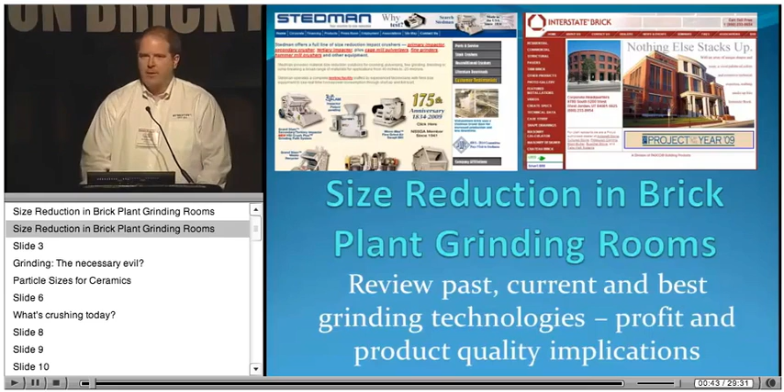So the fundamentals of size reduction, very basic. Forget about the types of machines. It's just adding energy to material to make large pieces smaller. That's the basis of it. Different types of machines exist to do that most efficiently, to put the energy into the material and get the desired product out at the lowest possible cost.

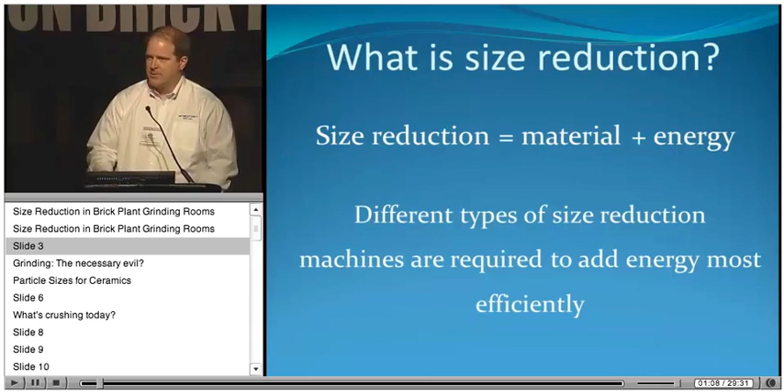Most of the people in this room were academically trained probably to make brick, and I don't find that the grinding room is the favorite place to hang out for most people in the brick industry, but it is a necessary evil. It's also something we're very passionate about because getting off to a good start with your raw materials is important, and we've heard that in a couple of the previous presentations already. So being consistent in how you prepare the material does affect the consistency of your product.

The equipment choices vary depending on the products you're making, and also the equipment choices will vary based on your raw materials. So even though there's a lot of common equipment in use, the combinations can be different, and testing is a very important element. Even though a lot of the same equipment is sold, we would really recommend testing your specific raw materials to make sure you're designing the process the right way with the right pieces of equipment.

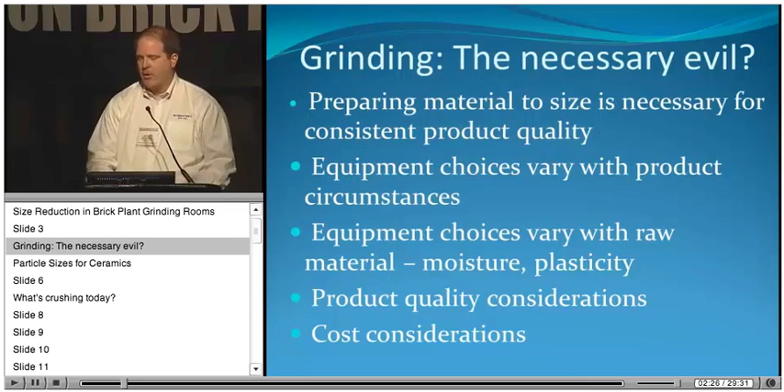I think most of you know these numbers, but as a reference for what we're talking about today, the common size ranges you want to grind to for face brick would be in that 4 to 12 mesh range. Architectural brick would be in the 10 to 18 mesh range. For ceramic roof tile, 18 to 30 mesh, and for ceramic floor tile, 20 to 70 mesh. Is that right, John? Good, he said yes.

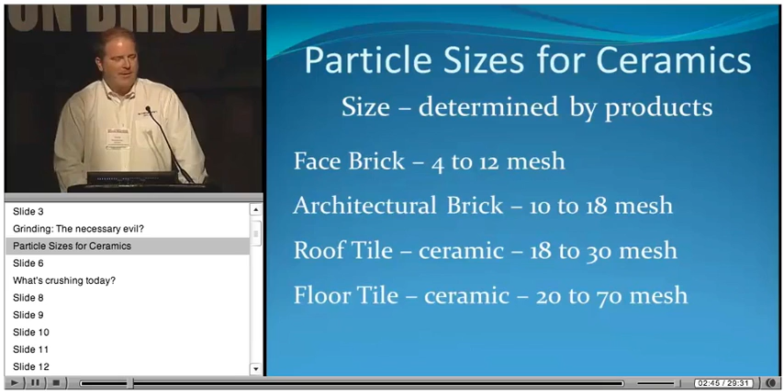The basic types of size reduction methods—again, forget about the machinery or brand names. Impact crushing is the idea of hitting something and breaking it into smaller pieces. Shear is tearing something; when there's fibrous materials, you want an action that depends on close clearances in a machine and can rip or tear at the material. Compression crushing is used in the industry, squeezing something under pressure until it cracks or fractures. Attrition is a little less common in the brick industry, but it's material hitting on itself and eventually breaking itself down.

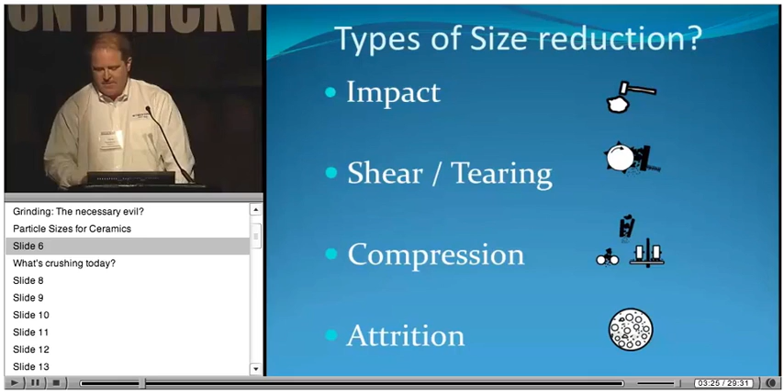This list represents sort of the 80-20 rule. There are different machines not on this list used in the brick industry, but this covers the vast majority of the plants you're all operating: jaw crusher, roll crusher, feeder breaker—which we'll get to—impact crushers, cage mill, dry pan, and hammer mills.

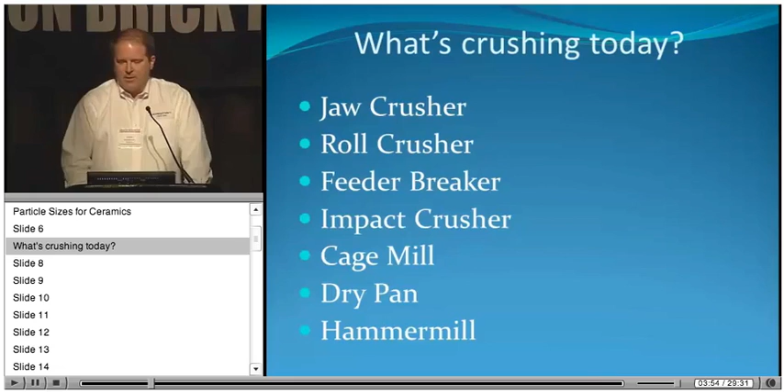The jaw crusher is an example of a compression-style crushing machine. You get very modest reduction ratios, 2, 3, or 4 to 1 type of reduction ratios, with a very modest horsepower per ton or energy input, 0.5 to 1 horsepower per ton. A jaw crusher would be used as a primary crusher. The real downside is if you have much moisture or plasticity, a jaw crusher can be a problem. I don't know what the opposite of a size reduction machine is, but you can really have some sticking problems. So there are some jaw crusher primaries, but they're few and far between.

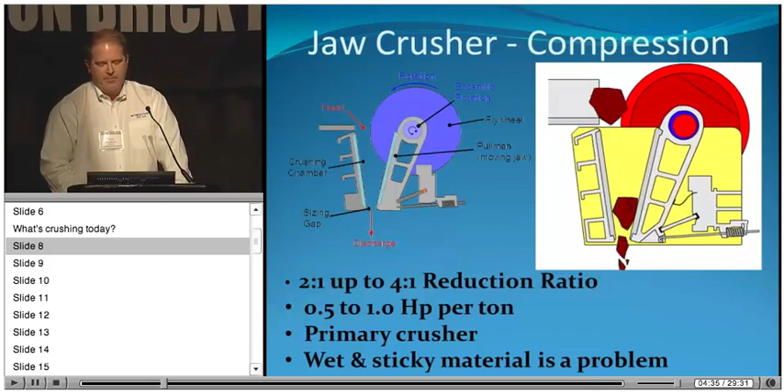Many brick plants in North America were designed with roll crusher primaries. A roll crusher has similar modest reduction ratios, about 5 to 1, again with very low energy input, 0.5 to 1 horsepower per ton. This is essentially a big lump breaker. In both a jaw crusher and a roll crusher, a lot of small material will just pass directly through—there's not going to be any additional reduction done. And roll crushers do at times have some problems with wet and sticky materials. So that can happen.

The roll crusher and the jaw crusher have something in common, that low energy input, and the reason why you don't see a lot of plants being designed with roll crushers and jaw crushers anymore, it's not very common, you're not making a lot of product. So if you're trying to get in your target mesh range, for face brick 4 to 12 mesh probably covers a lot of your plants here today, these machines cost about the same to install as other machines, but you're not making additional product in that first primary crushing step.

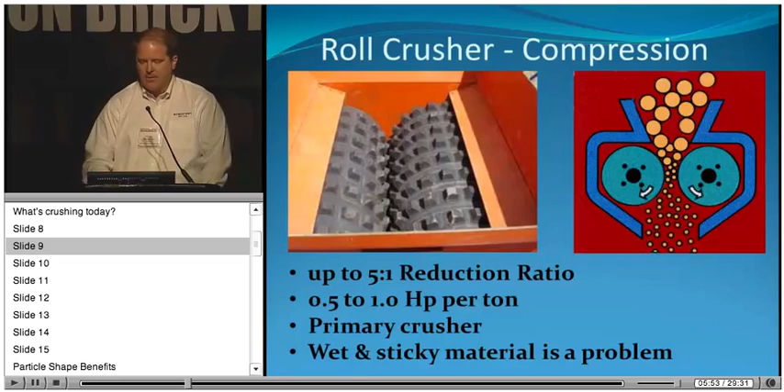A feeder breaker is sort of a mix between an apron feeder and a roll crusher. I think there's some interest in this room, and a couple brick plants actually using feeder breakers in their mines. Think of a bed of material going across an apron feeder or a belt, but this roll crusher, and in the picture you can see it looks like picks. It'll crack down the very largest pieces of material. So there probably is a place for this, again, in the right application.

I took some of the crusher type numbers with reduction ratios and horsepower per ton, because I'm not sure we want to call this a pure crusher, but this is a good machine. If you're interested in talking a little bit more about it, there's a manufacturer of feeder breakers that's represented well in the brick plant. If you want to stop by our booth tonight and talk about it, I'd be happy to do that.

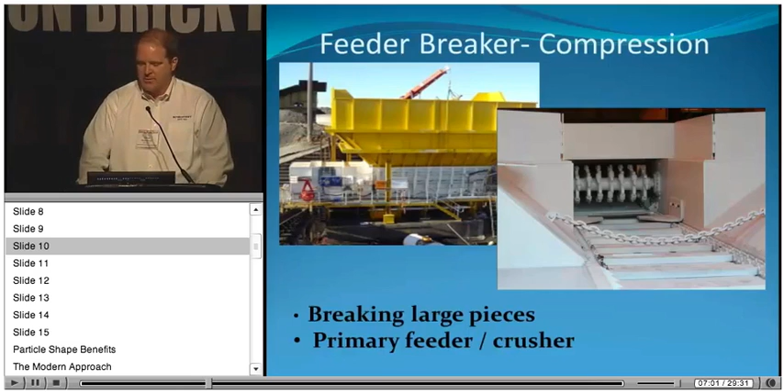Impact crushing, the idea of hitting something and breaking it apart, this machine really hits a lot of the sweet spots in terms of high reduction ratios with a very modest energy input, the 1 to 3 horsepower per ton, but you're getting up to a 30 to 1 reduction. So it's doing a lot of work on that material. This type of machine can be used for a primary, secondary, or tertiary crusher, and they've been installed in each position.

The real revolution on this style of machine in this industry has happened since the mid-90s. It allows production to continue in times of higher moisture. So if you're in the rainy season, or if you just have a wetter material, this machine internally is specifically designed for this industry, and has really helped save a lot of money. This machine has saved this industry millions of dollars over the last 15 or 20 years.

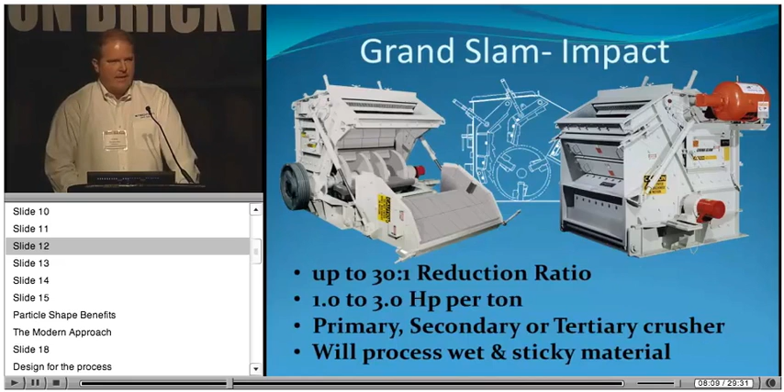The method of operation is very simple. It's a very open machine, and there's not screens or grates that hold material inside of it during the processing. The heated surfaces seem simple, but nobody had done it before, sort of the mid-90s, and this was an industry-led effort. We actually had customers come to Stedman and say, hey, we need something better, so we partnered with customers and people in this room to help get this technology into the market.

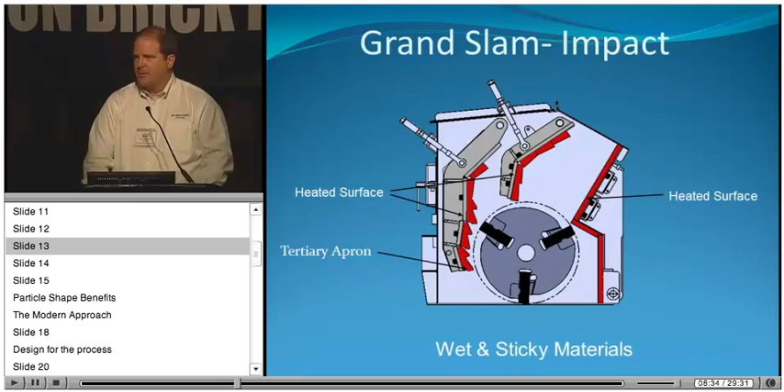Cage mills are usually used in a couple of situations. If you're making ceramic roof tile, ceramic floor tile, or if you have a material in your feed in a brick plant, say lime, where you need to grind a little bit finer so you don't have lime pops, a cage mill might be used. There aren't many cage mills, but it's again an impact style crusher, getting very high reduction ratios, up to 40 to 1. You're starting to have to put more energy into it, so that 2 to 7 horsepower per ton range. It's generally a tertiary crusher. Wet and sticky material is not a problem, but most brick plants don't need cage mills. It's sort of a special case for finer grind products that use this type of equipment.

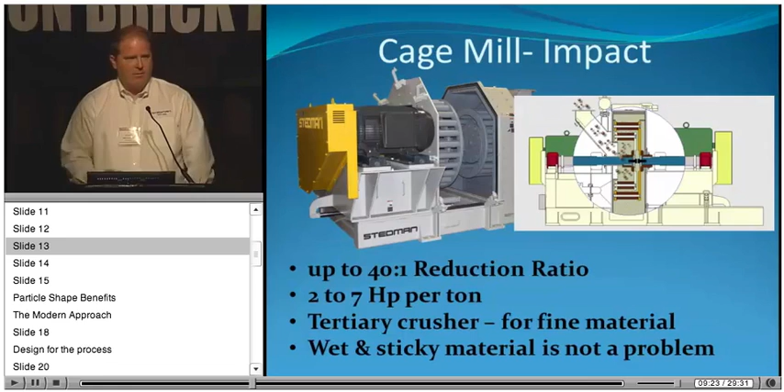Dry pans have been a workhorse of the industry for many, many years. There's quite a few well-designed grinding rooms in the brick plant that had roll crusher primaries, dry pan secondaries, and hammer mill tertiary crushers. This is a Muller type of wheels traveling over a bed of material.

And then there's a screen in the bottom of the machine that controls the output. Very moderate energy input, 3 to 5 horsepower per ton. These are typically secondary crushers.

Wet and sticky materials can be a problem. They're not always an issue. I mean, these machines can have pretty good staying power, but they're not quite as productive as you start getting to higher moisture levels. But dry pans have been a good workhorse in this industry.

Hammer mills are used less and less. Hammer mills are an example of tertiary crushers, typically. Some plants, as a side note, if you have a real low tonnage plant, it might be suboptimal to do this, but sometimes you'll still put a hammer mill into a smaller plant because it doesn't justify using one of the other pieces of equipment. But historically, hammer mills have been used as tertiary crushers.

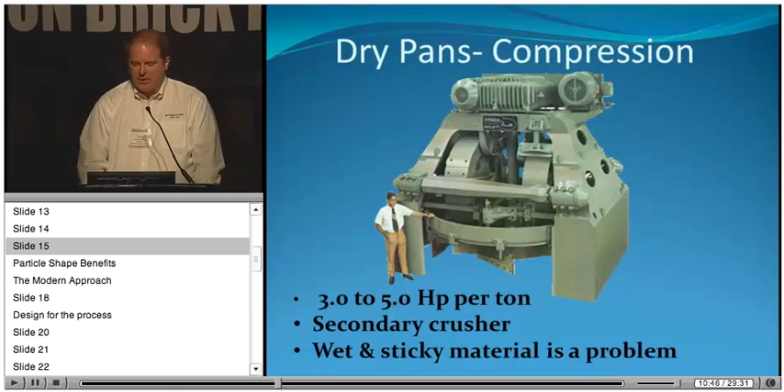You get very high reduction ratios, and I took some of that ratio off because depending on the size of the screen that's used in the machine to hold material in there, that really affects the reduction ratios. And again, wet and sticky materials can be a little bit tricky in a hammer mill, so that's a watch out.

The different types of size reduction machine affect the particle shape. These are things that industry feedback has given us in this presentation, but there are economic implications of each of these items.

So impact crushing tends to produce a more cubical particle shape, and that shape can translate into benefits of increasing the extruder die life, reducing the power draw of your extruder, improving the life of your screen cloth, and also increasing the removal of your product through the screening process, so your screen efficiency will go up.

And Bill Crone will talk about, or Scott will talk about that next from Midwestern.

Modern grinding rooms are driven, the equipment choices are driven by economics. It's that simple. I mean, it's not a gee whiz thing, it's a money thing. So we need to produce the product that you need in your plant most economically.

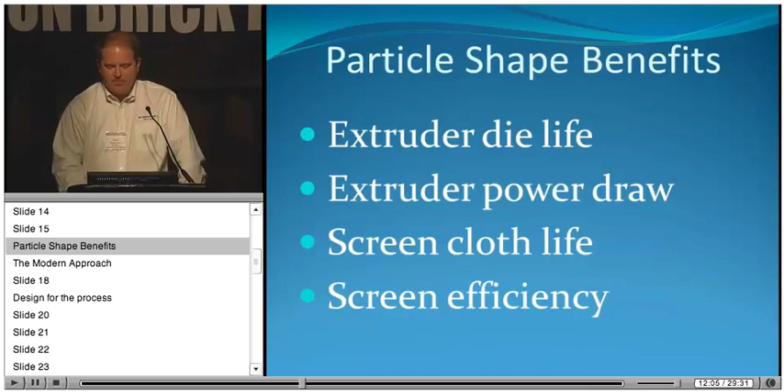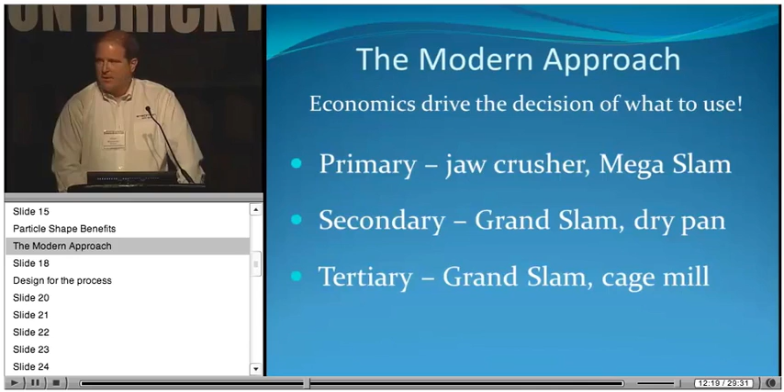So a modern plant may select a jaw crusher or a Mega Slam impact crusher for a primary. Those machines typically just need to deal with larger feed, and that's not always required. For a secondary crusher, Grand Slam impact crusher and dry pans. And for tertiary crushers, again, a Grand Slam or a cage mill.

So when we look at the process of crushing and what are the expenses related to it, these are all real common items that we look at to help customers do an analysis of what's the best for your situation. The operating and maintenance costs due to labor, they can be very significant with your crushing equipment.

A lot of times, I think the first brick plant I went in when I joined Stedman 7 years ago, the person that took me through the plant said they hadn't been in their grinding room for a year. Well, they had people working out there for that year, but the management person hadn't been out there. You can't ignore it. So there can be quite a lot of money tied up.

Wear parts, the grease and oil, some styles of machinery really consume a lot of lubricants, and it's sort of one of those hidden things because the plant manager and the guy squirting the grease into the machine - but we have customers that were consuming drums of grease a month at quite a high expense, and there's ways out of that. Power consumption, housekeeping, that's becoming more and more of an issue.

So I think moving forward, we're seeing the adoption of more and more stringent standards relative to housekeeping. And one of the things is some of the higher energy input machines do generate some airflow, but you're going to have to control that in any situation.

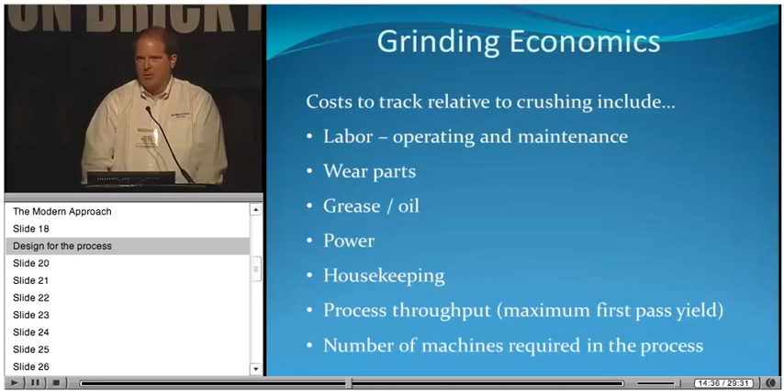Mentioned it several times, we don't sell crushers in a little box. They go into a process. We have to understand the whole process, and we work hard to do that. One of the really significant payback drivers for a modern grinding room is taking 2 or 3 machines out and putting 1 machine back.

Testing is absolutely key to being successful with what you're doing in a new grinding room. Not just size reduction results, but understanding what the power consumption on your material is and getting those wear cost estimates in advance. It's not a one-size-fits-all.

Clay is not clay, you guys are all very aware of that. Shale is not shale. You really have to understand what your material is going to do in the equipment and make sure that's quantified, so before you launch off and make an investment in a new machine, you know exactly what you're up for.

Industry experience matters. You don't want people reinventing the wheel. There are a lot of machines that look similar to some of these I've shown you, but not all are designed the same. So understanding those differences and the finer points.

I would recommend talking to other reference customers. I know from personal experience, our best salespeople at Stedman are actually producers. We'll get into that in a minute with John Hewitt. So John's going to take over from this point.

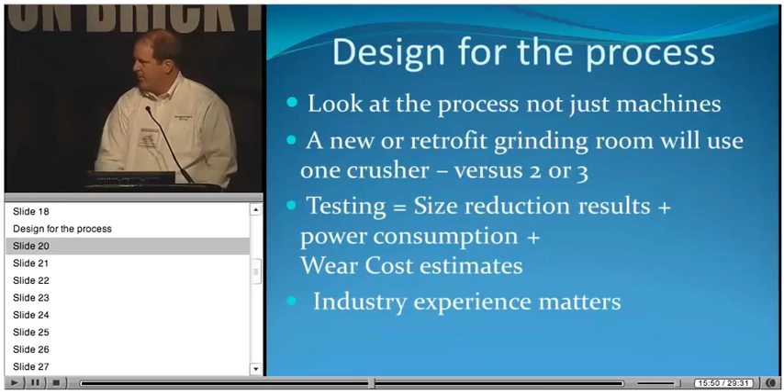You're all probably familiar with Interstate Brick. Interstate Brick in West Jordan, Utah is widely recognized as one of the premier commercial brick manufacturers in the U.S. Established in 1891, Interstate joined the Pacific Coast Building Products family in 1990. The company's products are used in residential and commercial construction. They offer several distinguishing features that motivate architects and builders across the country to specify them.

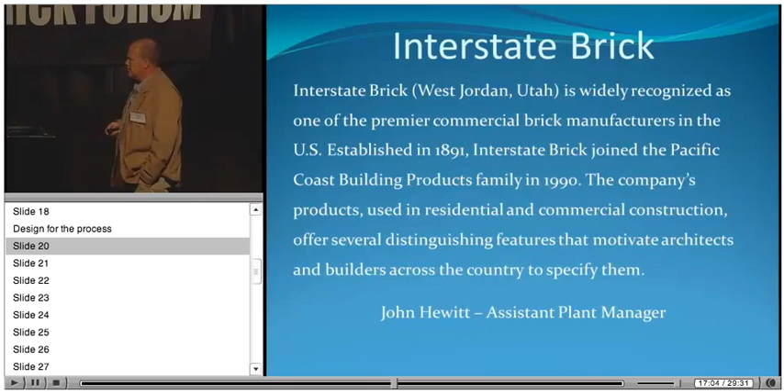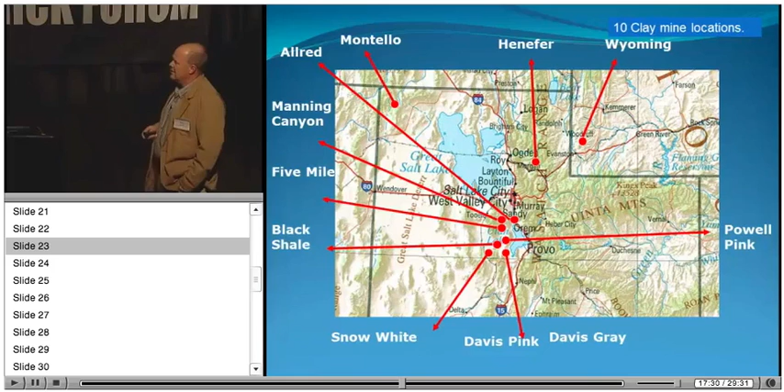So just before we get into our project, I'll explain how Interstate Brick works. Maybe we're a little unique. That's a map of the state of Utah. We have 10 mines all around the state, and a lot of them are kind of small. Our number one clay comes from the southwestern corner of Wyoming, near Evanston. So we blend all these clays together to make a lot of different colors.

This is just one of our mines, the clay is sandwiched between layers of limestone, and in this particular mine, it's dipping at about 30 degrees, pretty shallow. So that limestone has to be blasted and removed. It'll probably get used as road base someday. So we move around, we use this set of equipment and move it around to our different mines - track hoe and a dump truck primarily.

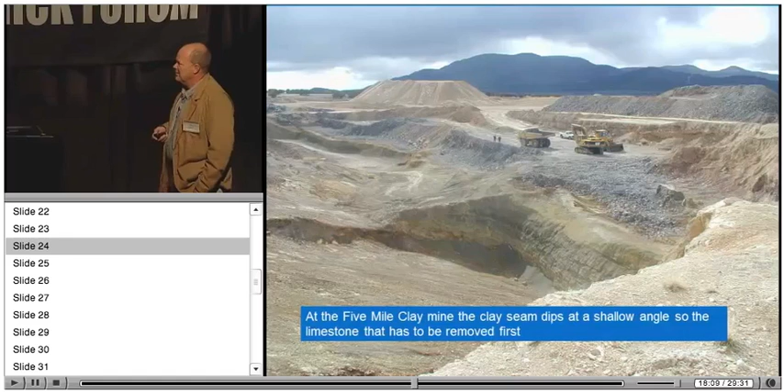This is another, our materials vary. We have different kinds of clays. It's really the color we're looking for, mostly, and then the properties. So at each one of our mines, we kind of shoot for a 2-year supply of clay, and we like to mine every other year. We're lucky in Utah, these mines are so far apart, but we use these aluminum trucks that can haul 40 tons of clay at a time.

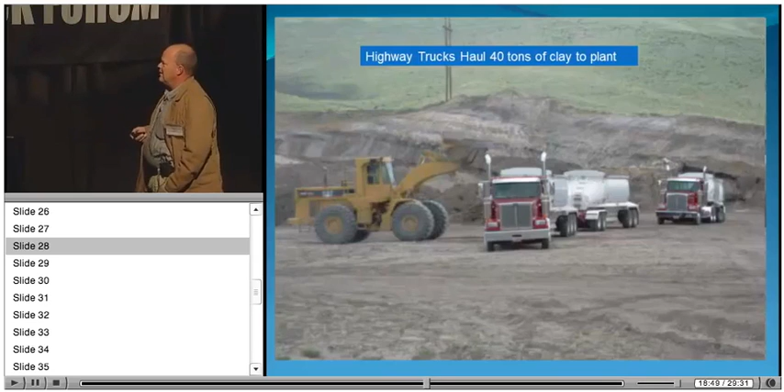So this is the one mine up in Wyoming that's really kind of typical of the mines back east here. We could, you could probably use a pan scraper here. It's really large and horizontally bedded. It's a fire clay. So the trucks come into the plant and get weighed in our scales. Then at the plant, we stockpile about a 6-month supply, because some of our mines are inaccessible during the winter.

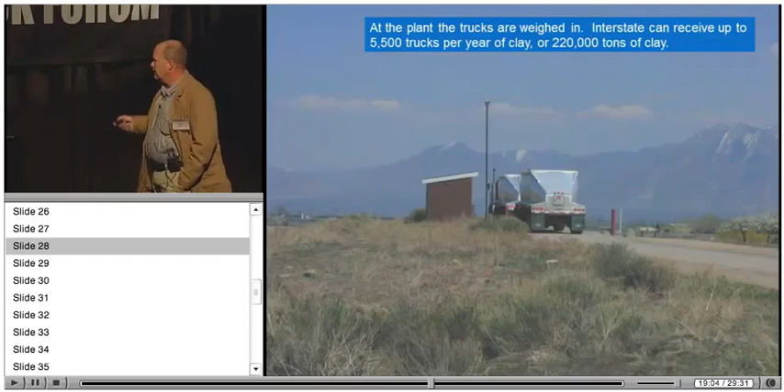And we have a shed, and we can pre-mix clays, so we have them on hand for jobs that come in. We can store it under the shed to help keep it dry.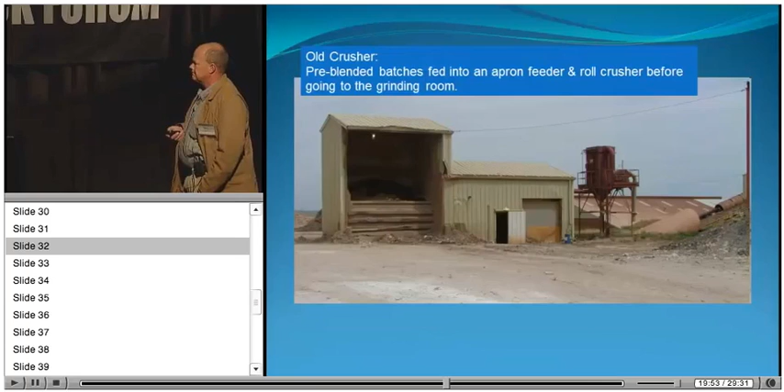And this is the inside, the apron feeder and the chute that dropped down, and that's the single roll crusher. Just like Chris said, the single roll crusher just kind of chewed on the material and broke up the lumps. What we decided on our project was to get a machine that could do more work up front and maybe unload some of the work being done downstream.

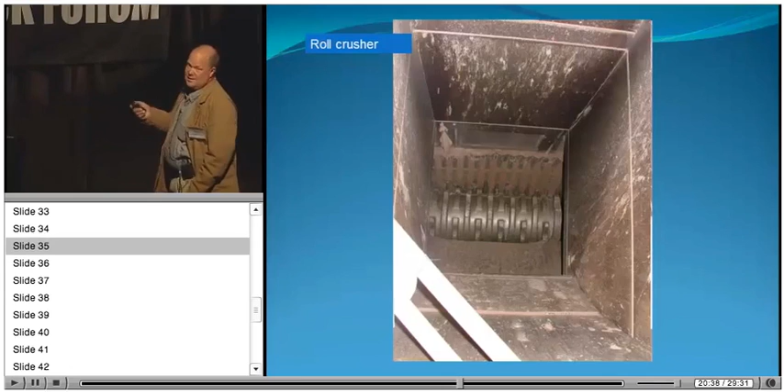That's the crusher underground. So this is kind of the layout of our grinding room. It's taken me years to get my head wrapped around this. It's a big grinding room. We have these big silos on the side, and it's really two grinding rooms that are mirror images of each other, so one can do one plant, one can do another. We have two plants, and we've since added two more screens on each side. But you can see inside we have these four pan grinders in there.

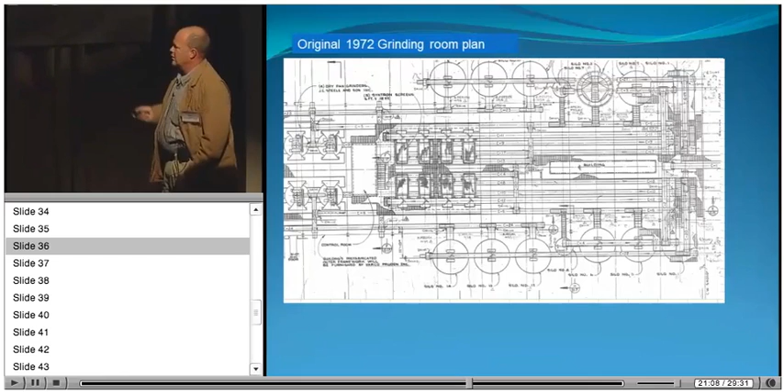So the clay went through that single roll crusher into those silos and then straight to the pan grinders before going to the screens. This is a picture of our grinders - of course this is a little lab version, but that's kind of how they work. They have the big wheels that roll over the material.

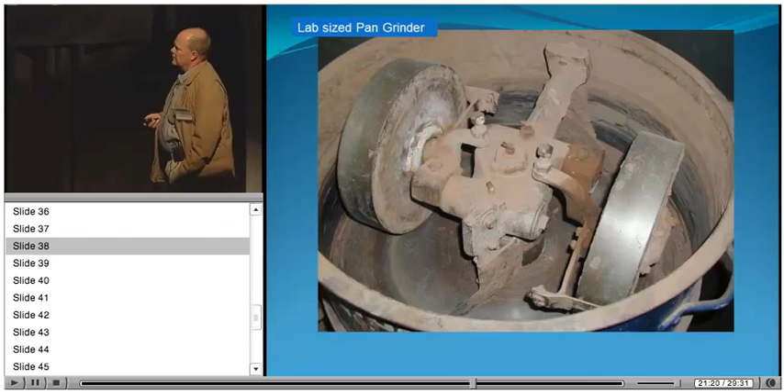So this is kind of a summary. Those are our screen banks, and that's kind of what the material looks like going up, what it looked like before, and what's going into the Stedman now.

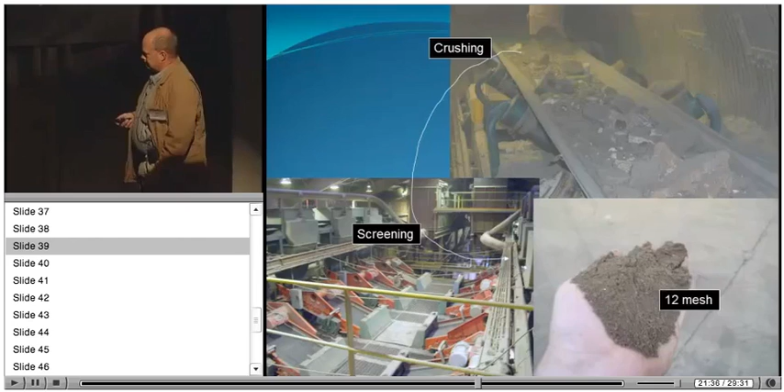And this is what we used to have before - there's the apron feeder, it dropped down. One of the problems we were hoping to get away from is that crusher was underground, so down at the bottom where it discharged, it would build up a lot of material and it would just have to be dug out a lot. That was kind of a hassle.

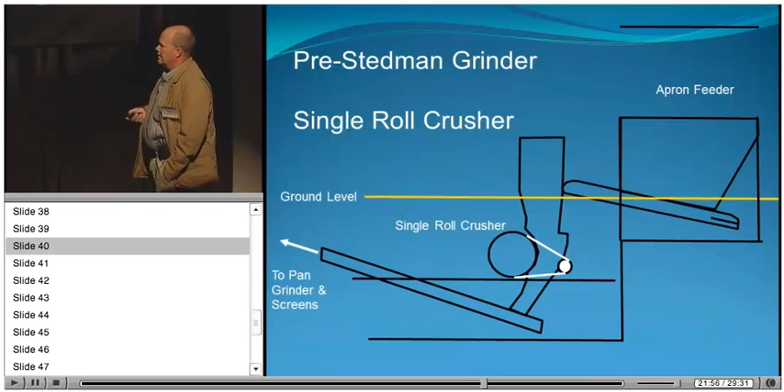So this is Stedman, and this was important. About the time we were doing this project, Stedman bought an engineering company, Innovative Processing Solutions, because we wanted a turnkey project. So they were able to do everything for us, which was really good.

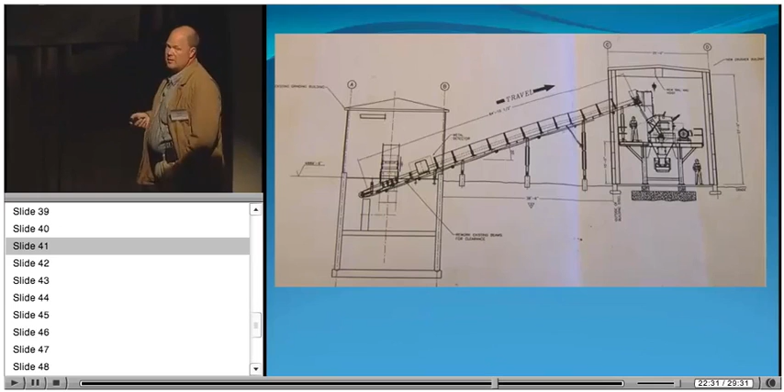So this is where that used to fall out of the apron feeder. We just put another conveyor up and put the crusher in a new building, but you can see it's all above ground. This is just another shot of their drawing showing how it makes a bypass around and then comes back and joins that belt where it used to come out from underground.

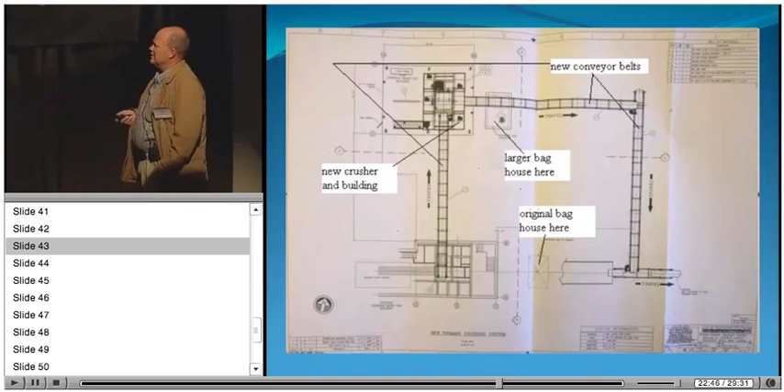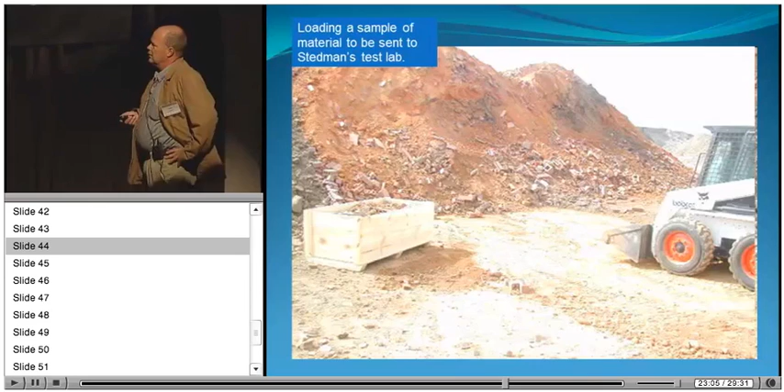Stedman did a great job of planning everything. The whole project, laid it out - it went really smooth. We ran the whole time; we were able to do it without disrupting our production.

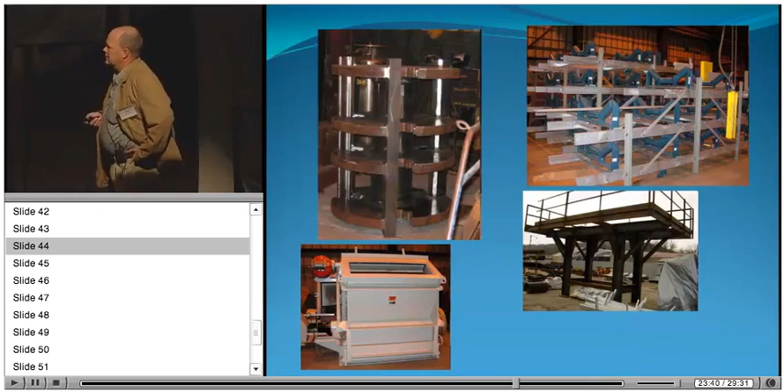So these are just some pictures. They found local contractors that poured the concrete and did the building. A great crew of guys came out and assembled everything and put it together, and it went off really well.

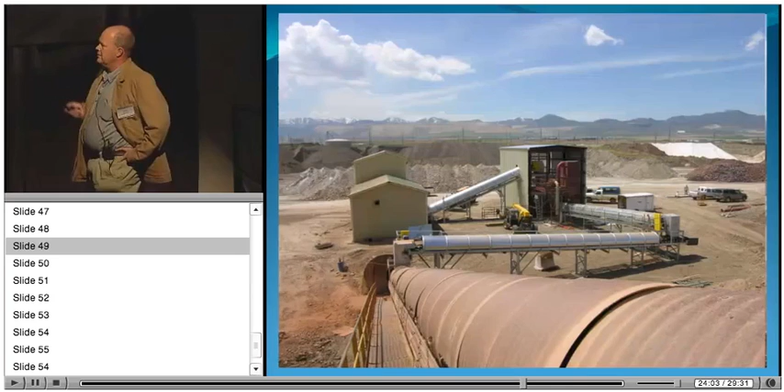One of the things about the impactor - we did have a dust collector and we just moved it over from our old crusher, but really the new crusher was making more dust, so we were lucky we had a larger dust collector we weren't using, so we put that in place. We also upgraded our bags.

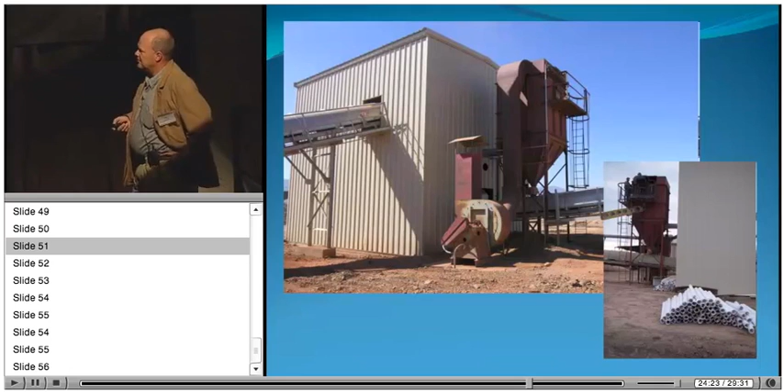That's a little metal detector that's there to catch things going into the crusher, although I don't think anything would really hurt it if it went in.

So the bottom line of our project, and it really has been a good project for us, we use a lot less wear parts than we used to and less downtime. We're only on our 3rd set of these breaker bars in the 4 years we've had this. And really our wear was a whole lot less than what Chris predicted. I think he wanted us to feel good or something. But we basically get about a year out of these bars, and there's a whole lot less maintenance.

The guys, and this is stuff I got from our guys in the back, they like it a lot. A lot less grease and greasing. The machine is easier to access. It's not a confined space, which I think's really good.

And I think even when you open it up, it probably can't be started when the hood's up, right?

Am I getting some feedback? Oh, okay.

One of the big things that'll probably lead to another phase someday is, and the operators told me this, it really doesn't require an operator sitting there watching it all the time. And it doesn't hurt the machine to run dry, it'll just sit there and spin. So right now for our machines inside, we have an operator that has to watch them all the time, but this would really free up that person.

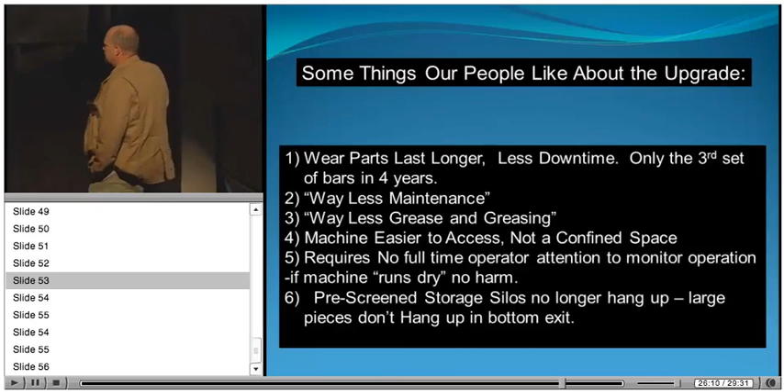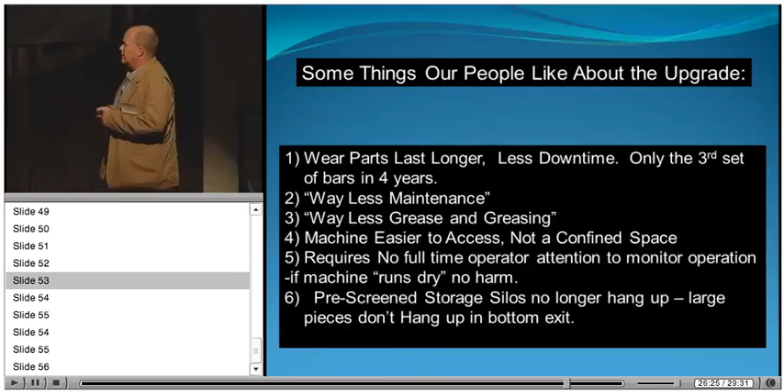And then something we never even anticipated, those big silos, since we're doing a lot more work up front and reducing all the sizes, we used to have material get hung up in those silos, but since we've put the machine in, we haven't had to go in there, which is another confined space in a dangerous situation. So we got totally out of that. Those haven't plugged up or anything.

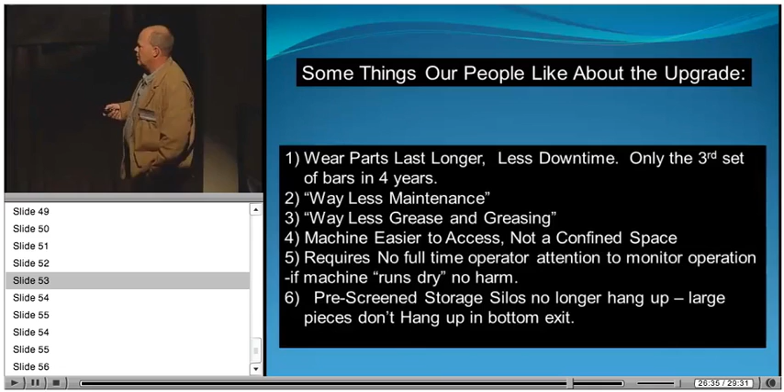So it's really been a good project. And again, this is how the machine just flips down in that bar. There's 4 of those, and they just change them out, and they can be flipped around.

One thing I learned about this machine, you do have to make sure when you put it in what you want it to do. Some people, if you rely on it to really reduce a whole lot, you have this gap setting between the bars and the aprons, and I guess the tighter that gap is, the more it's going to wear. So in our case, after we got the machine in, we actually were able to open that gap up some, and it's probably helped us, so the bars can get a little more rounded. But we are definitely getting a whole lot more work out of it, out of our grinding room up front.

Another nice thing is the bars are the only thing we've had to replace so far. There's a lot of other wear parts, but they're all the same. And I think some of them may have worn in a couple spots, but you can just take another one from another area that's not worn and plug it in, just exchange them.

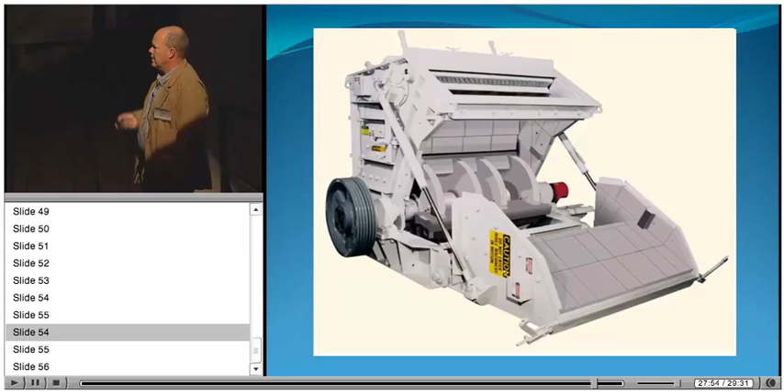That's worked well. So the next phase, when we put this machine in, we were hoping to eliminate having to use 2 of those pan grinders, and we did. So now we only have to have 2 instead of 4. The next phase will probably be to put some Grand Slams inside, either 1 or 2, probably 1 on each side. And the guys in the back are really looking forward to that.

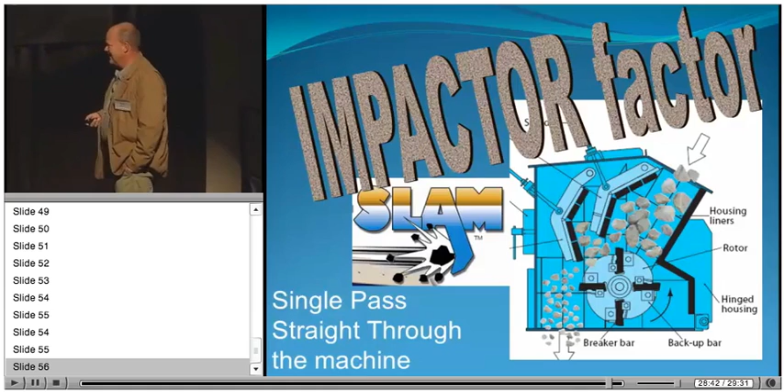And this is kind of, since I've been working in the industry about 20 years, I think the impactor, I call it the impactor factor, I think it is a novel idea that's kind of caught on. And how many of these things, Chris, are out there, do you think? 75 in the brick plants in the last 15 years.

I think it's just that rotor's spinning really fast and the material just drops through there and it just whacks it on the way through. So it really doesn't have a chance, I guess, to plug up as bad. And somehow, I don't exactly know why, but the wear for us seems to be a whole lot less. So I think it is a great machine for our industry.

So it's been a good project, and look forward to the next one when we can convince everybody of that. So.